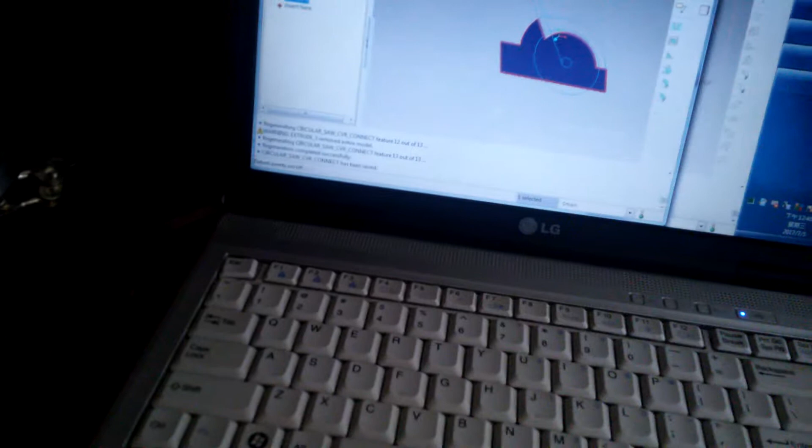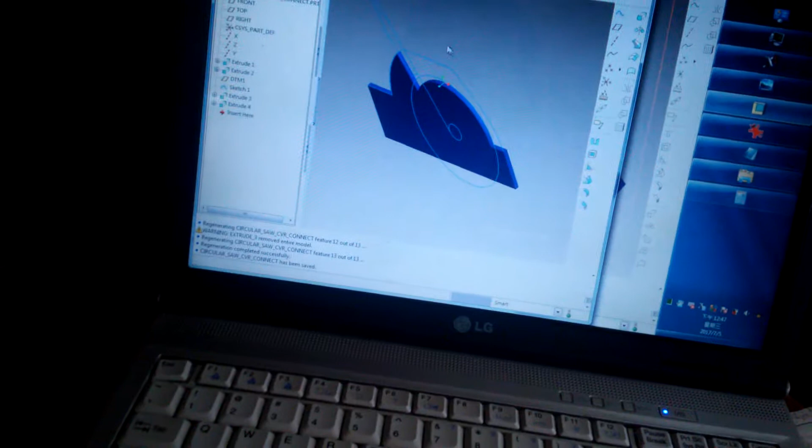So I need to design this cover a little bit, and I first draw the CAD file. I haven't got this CAD file. I need to draw this part in 3D in the computer, and design the additional cover on it, and then I will 3D print the parts. This is not yet finished. After finishing up, I will print it on my 3D printer.

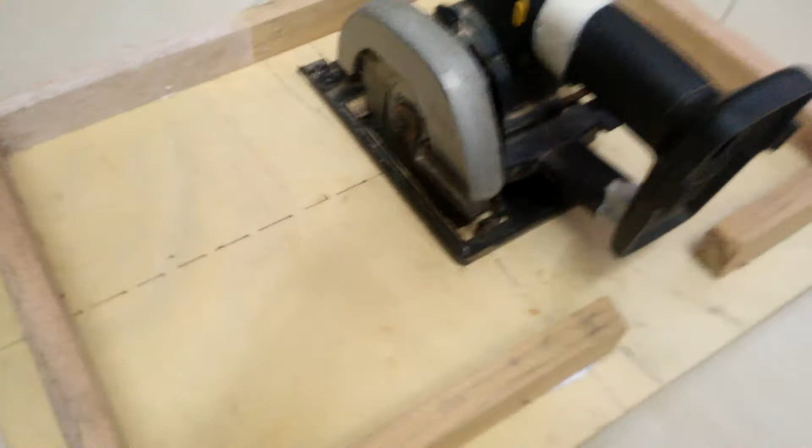Circular saw mounted on the table top, and also these wooden pins are added. It's 3/4 width and 1.5 inch long. And this blade guide can be operated. And later on I will make the legs, 4 legs.

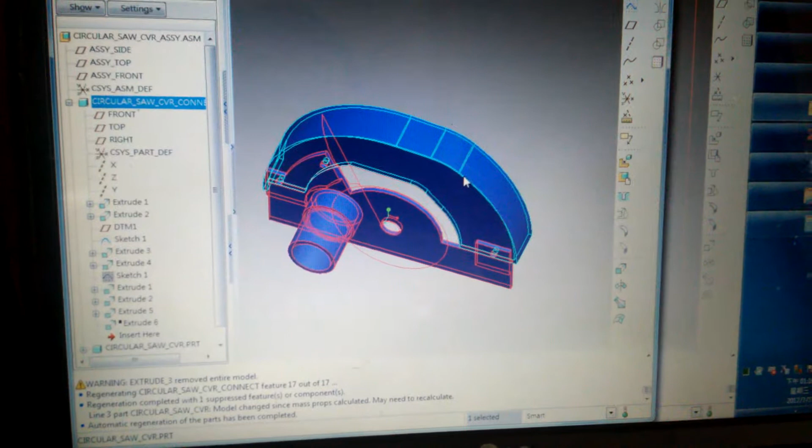The 3D model, and the red boundary is the new part that I need to print. And this is the original metal cover. I need to drill 3 screw holes to mount this new plastic additional cover on the original cover, and this circular connector is used for connection of the hose.

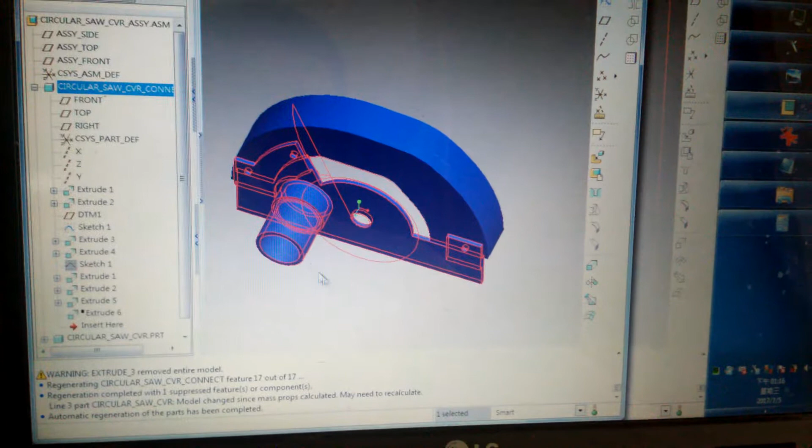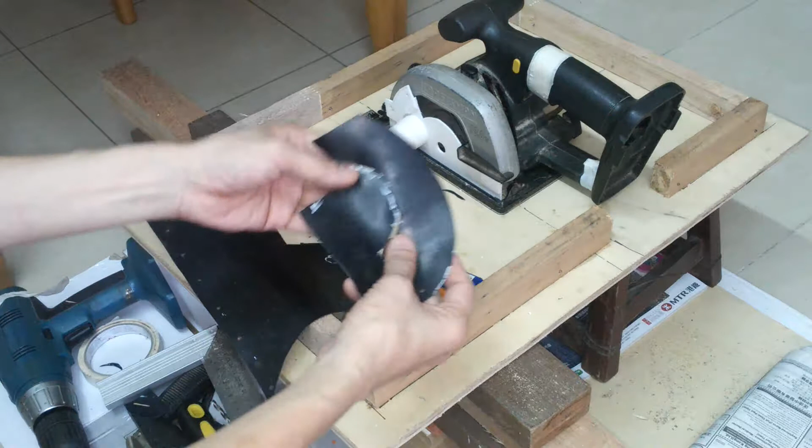Now I'm going to fix them together. Here is the fit. This rubber sheet was made up, and also here 3 screws were used to mount this plastic cover onto this aluminum hood. After doing some trimming work to make this rubber sheet a good fit with the assembly, 2 holes are cut here to make way for the screw heads.

And then I'm going to use some adhesive glue to fix these sheets onto these plastic parts.

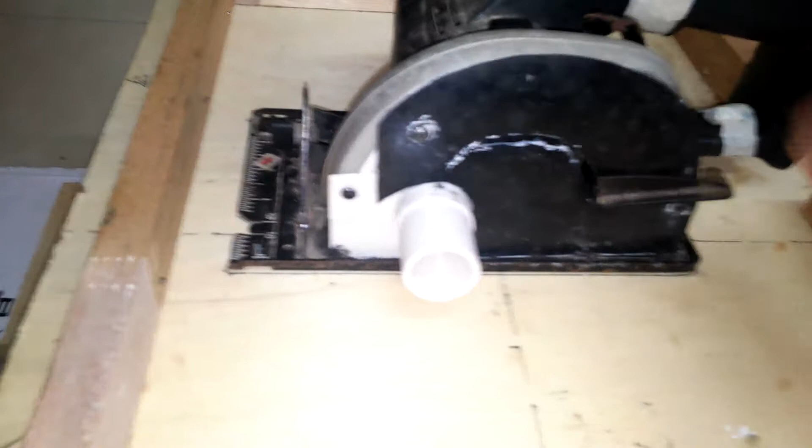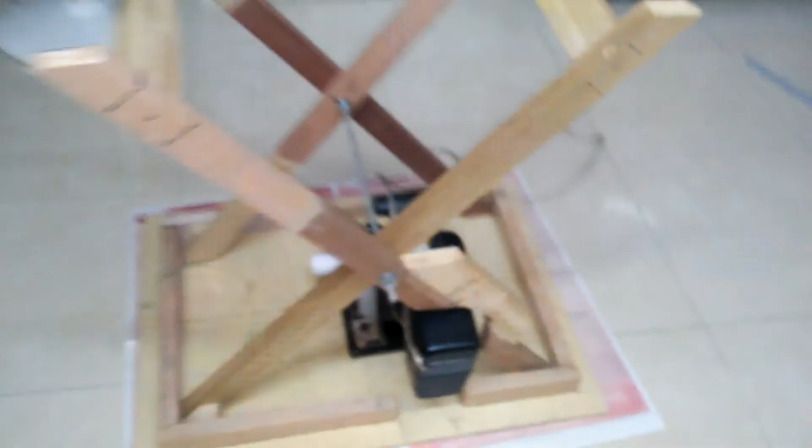This portion finished. Now building. See here. Almost finished, and here is the leg stand, and here I found this portion interferes with the circular saw, so I need to cut off here. Before cutting off, I assemble another wooden piece here first, glue it and put the nail here. After it dries a little, I cut off this area to make way for the power pad of the circular saw.

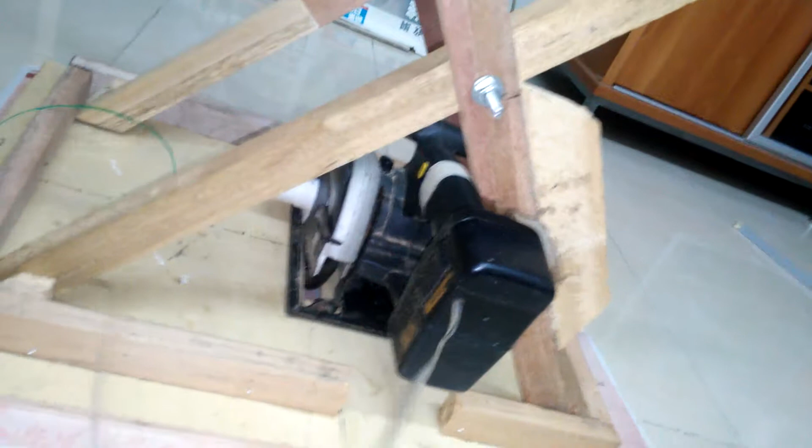And I found the rechargeable battery is bad, so I'm going to use a power supply to run the circular saw. And this leg assembly is here. I made this circular saw table detachable. Yes, I can disassemble it when I don't need to use it, so I can save space.

My living room is of limited space, and here this is foldable, and this is foldable, that way, and it was mounted by screw studs, and in each area I use 2 hex nuts. Another hex nut is to fix the position, and here I put on other wooden pieces to reinforce it, and here I put on 2 wooden blocks because the position is in here.